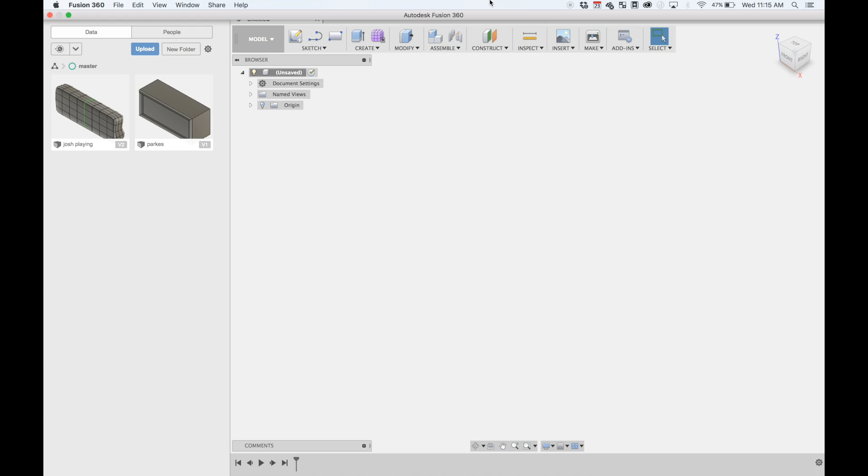Okay, today we're going to run through a very basic speaker design and how to actually split it into two separate bodies and then shell it out.

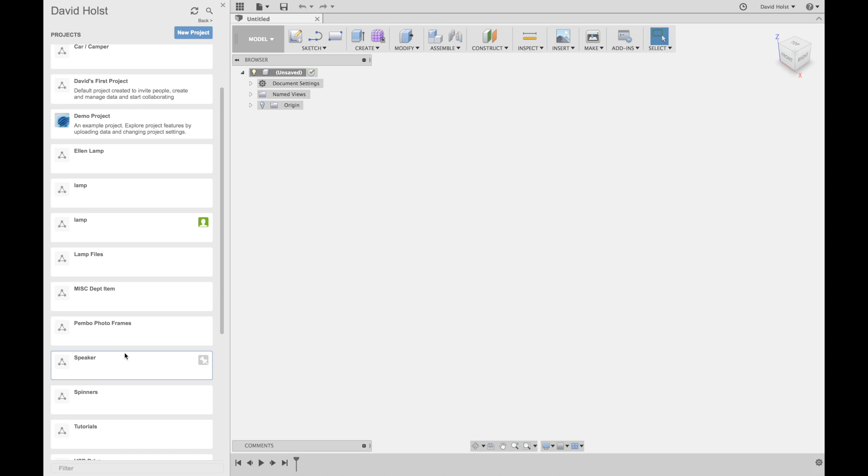The first thing you want to do is make sure you've got a speaker project created. If not, click the new project button and create a project called speaker, and then you can go into your speaker folder and see the stuff you're working on. I'm just going to make a brand new one.

So I've made a new document here. The first thing I'm going to do is hit save. I'm going to save it as tute, because you need to save it first, because as soon as you start saving the file, it's going to automatically save the whole time. So in theory, you should never ever lose any work.

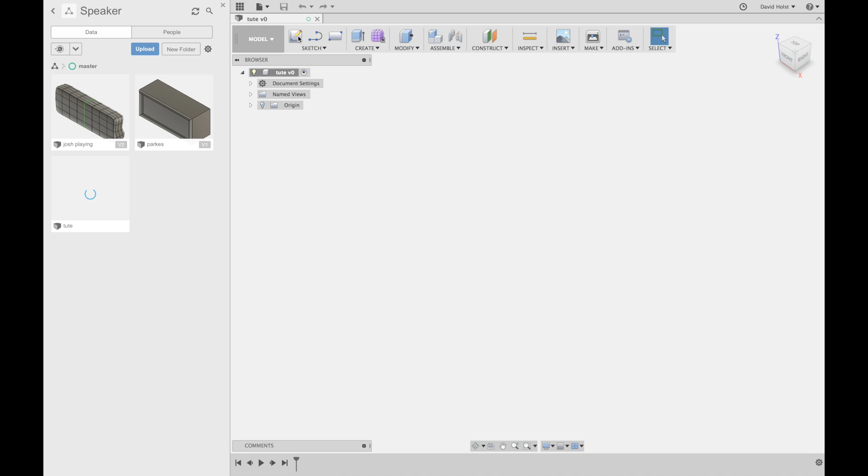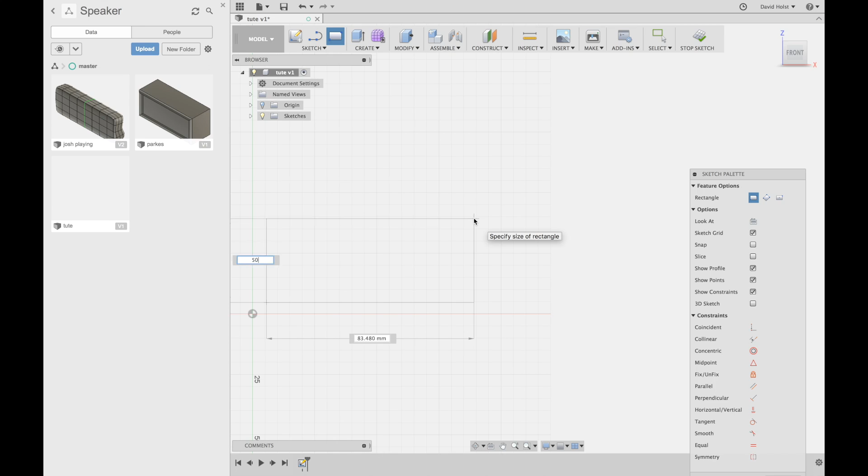To start with, I'm going to create a new sketch, and I'm going to select the front, which is this diamond here. I know I'm drawing on the front because it says front up here. I'm going to create a rectangle, which I can click on the rectangle button or hit R, and let's say I'm going to make it maybe 50 mil by 120. To change between those dimensions, I've just hit the tab key, like so.

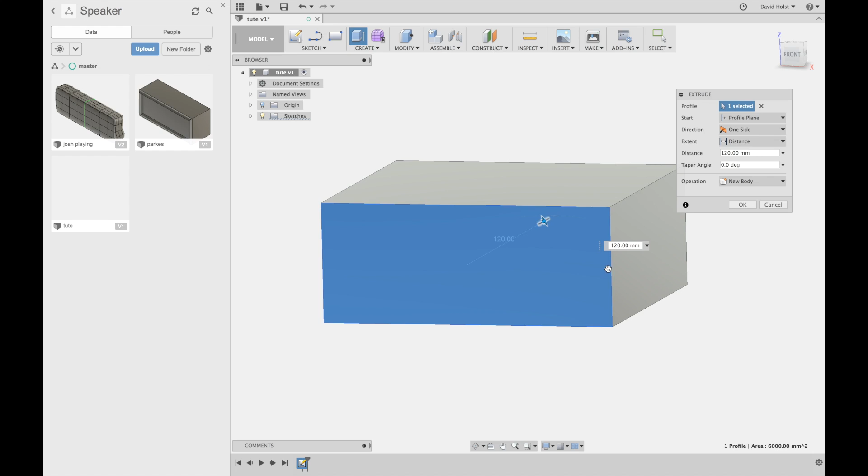I'm then going to hit E to extrude it. Click on that face, and I'm going to push it out the back, 120 mil, like so.

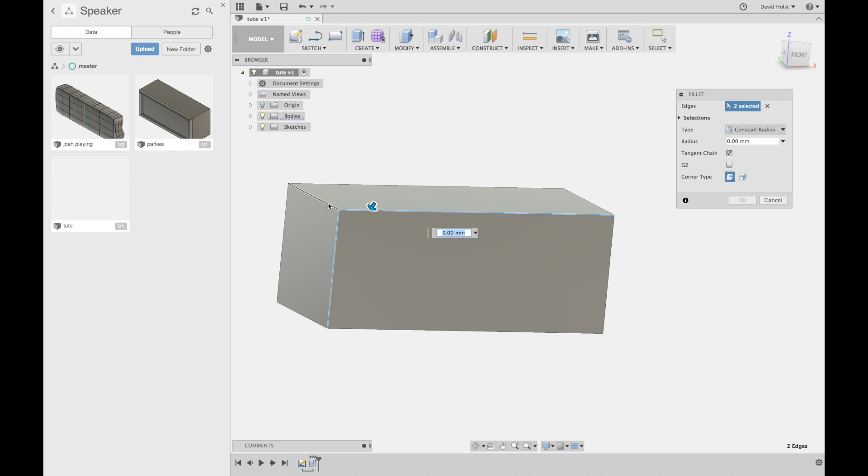And what we're going to do is we're actually going to draw up the outside of the speaker. So we're actually going to not worry about any of the internal stuff and just make a solid object which reflects what the outside of the external parts of the speaker are actually going to look like.

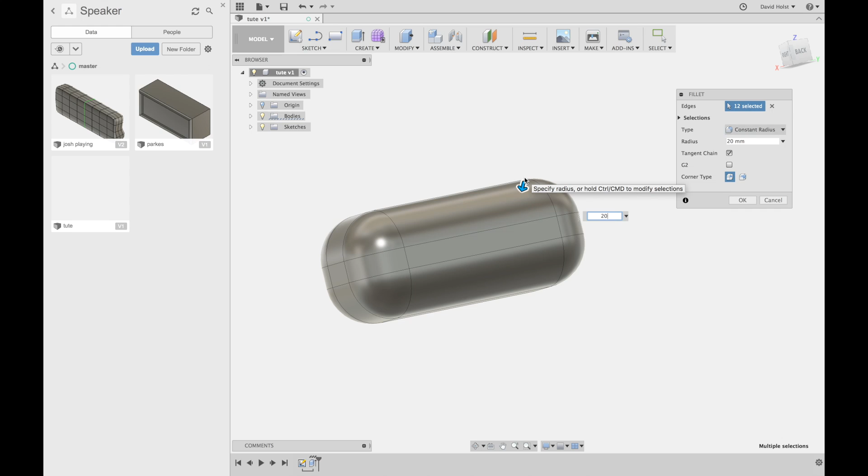So I'm going to select all these edges, like so, and then I'm going to put a 20 mil, or maybe a 15 mil fillet on there, like so, maybe 10, yeah, something like that.

Perfect. So I've got something there that looks kind of roughly like the speaker I want to create. And now what I need to do is I actually need to split that in half.

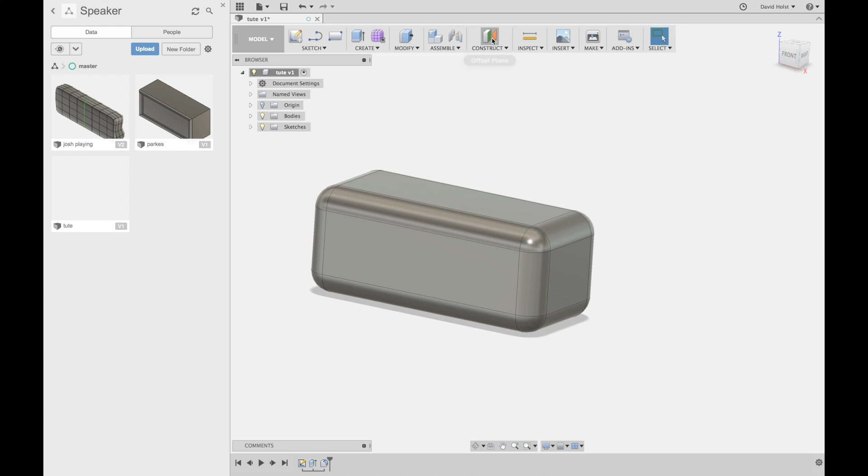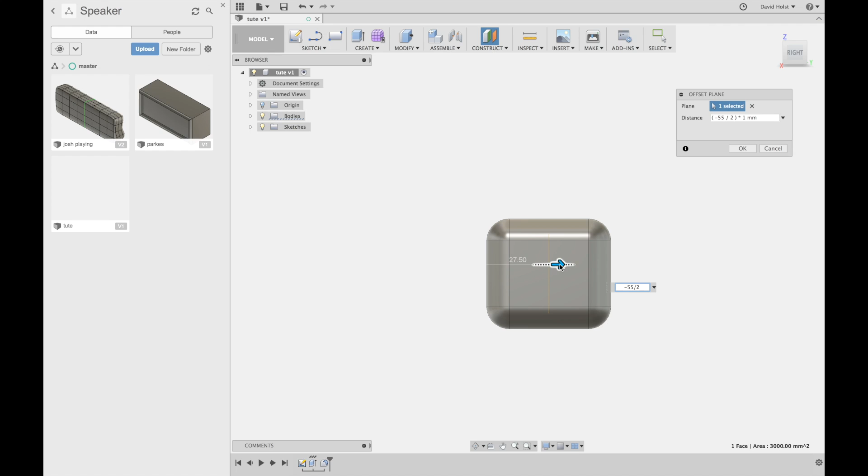So to do that, I'm going to actually create a new sketch in the middle of this speaker design. I'm going to click on Construct Offset Plane, select my front face here, and push it back. Now, if memory serves, my speaker was 55 mil, so I'm just going to type in negative 55 over 2. That'll give me 27.5, and that's halfway through.

So now I've got that plane in the middle. Now what I'm going to do is click on Sketch and create a sketch on that work plane. And now I'm just going to hit R and make a rectangle any old size, as long as it's bigger than the speaker, like so. And that's what I'm going to use to split this into two halves.

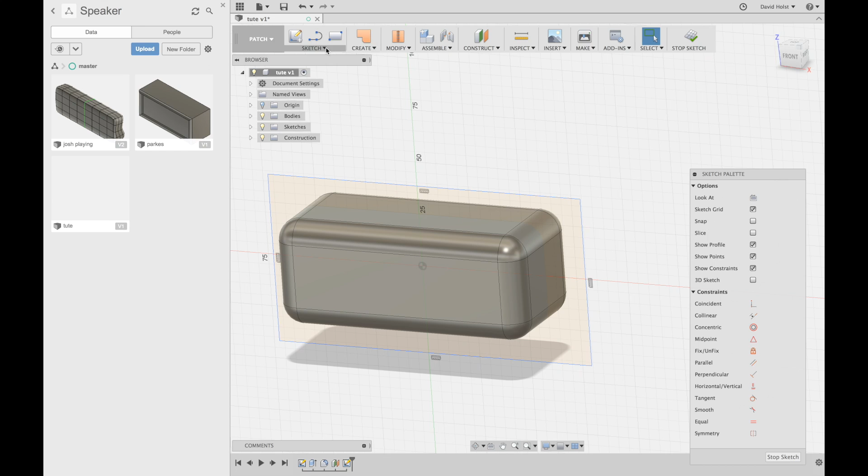So I'm going to go click up a model here. I'm going to go to Patch, click Create, select that square, and hit OK. So now I've actually created a flat surface, which I can use to split my speaker in half.

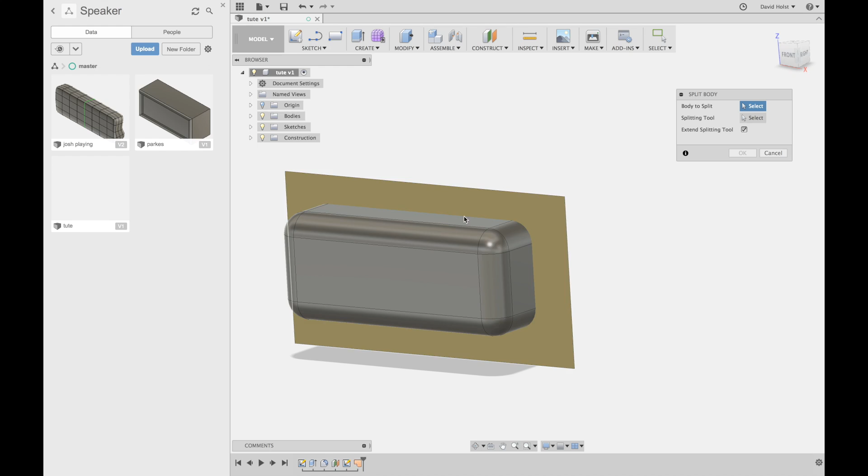So I can go back to Patch up here, go back into Model, click on Modify, and Split Body. Then I can actually click on the body here, click on the splitting tool, and hit OK.

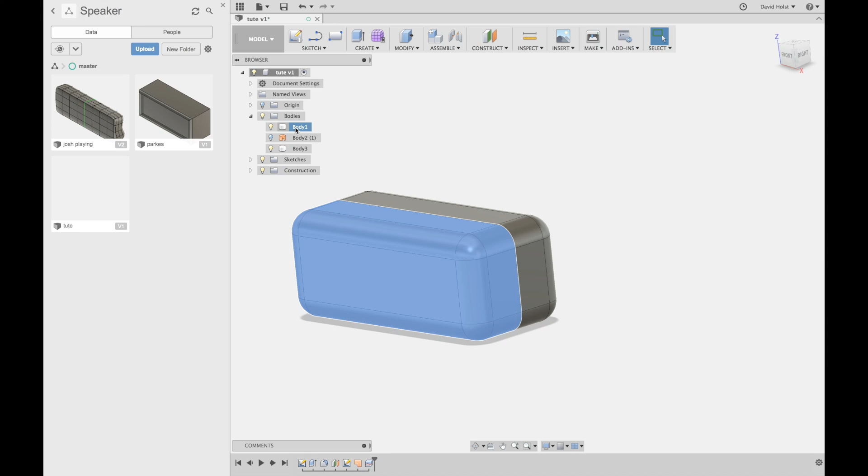Now that's done, it doesn't look like it's done much, but if I go over to my tree here and go to bodies, I can turn off that surface, and I've actually made two separate bodies here. So what I might do is change the names of those and call this one front and call this one back.

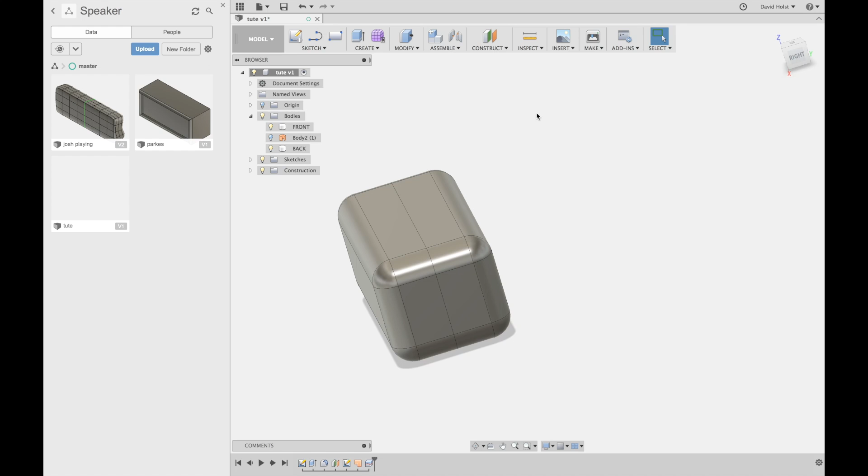Now what this allows me to do is it allows me to actually start to shell out the speaker and make it hollow. So what I'm going to do is turn the back off with this little bulb here. And now I can come from the back and go to Modify...

Shell, and I can actually click on this back piece here. And let's say I want to go about 5 millimeters. I can go 5 like that. Hit Enter, and I've actually shelled that piece out.

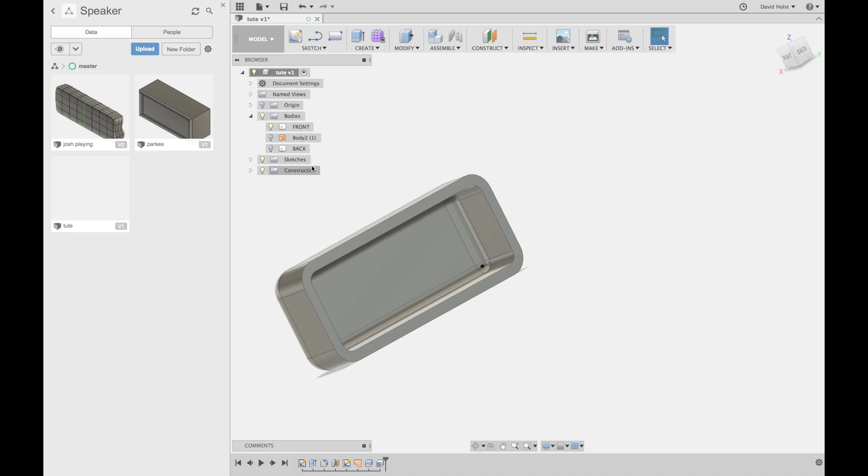I can do the same, turn the front off, turn the back on. Then I can do the modify shell, do the same here, and actually go 5mm on that as well, like so.

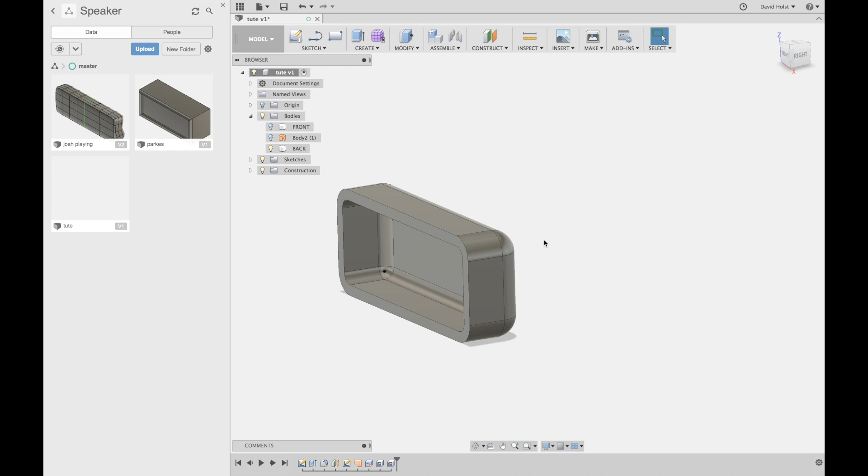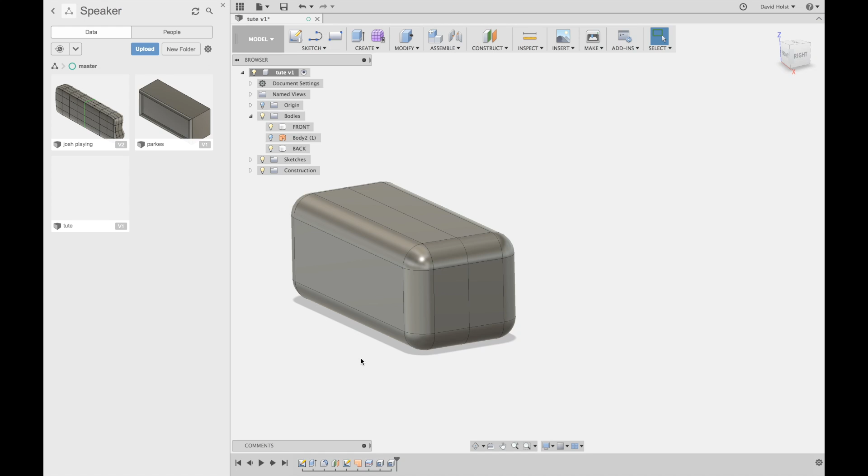Now I've got two parts that have been shelled out. So I'm starting to get something that's starting to resemble a speaker. The main steps when you're actually designing a speaker are to work out the dimensions of the speaker, draw the outside as a solid object, split it in half, and then start to shell things out.

Now, if you wanted to add your magnet holes, you would do that on this edge and be able to extrude it the way through. But if you just follow this tutorial and do it this way, it'll teach you the basic skills, and then you can apply those to your individual speaker design. Thank you.